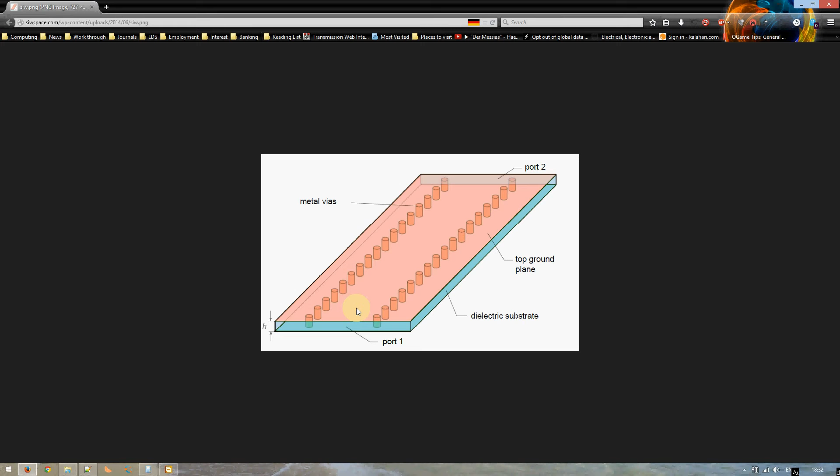We're going to go here, MW plus RF plus optical. That's the one that we want to use. And SIW is most like in the circuits and components. Basically, you just choose what your project is and the topic that it most resembles. Now, I know from past experience that waveguide couplers and dividers seems to work best. If you are building some of these other things, naturally that will be what we want to use. We want to use the time domain solver. The frequency domain solver can also be used. I'll go through why that is in a few minutes.

Dimensions, these are pretty straightforward. One thing that I would recommend looking at is here the units of length in millimeters and frequency in gigahertz, particularly because of the ranges that we're going to want to be working with. Millimeters and gigahertz are appropriate. If you're doing something with much higher frequency or very much smaller, then you may want to consider using micrometers or what have you. Conversely, if you're doing a very large structure, centimeters or meters may be more appropriate.

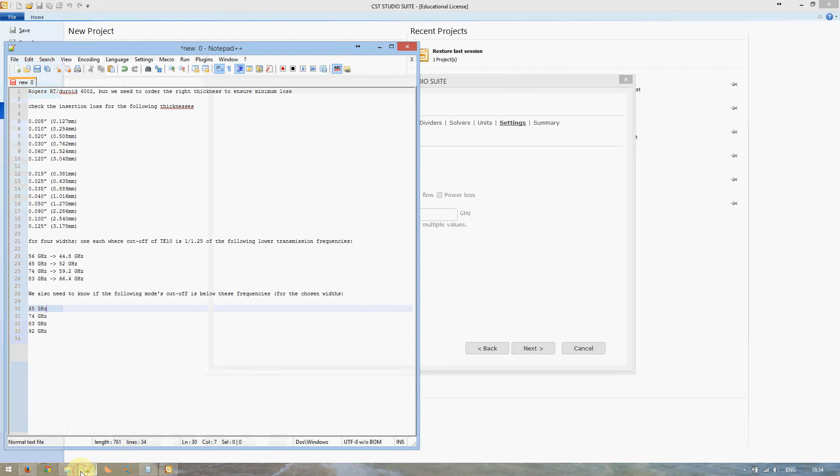The frequency range, this can be adjusted later, but for the time being I'm going to go with 56 to 83 gigahertz. You can set up field monitors if you like. This can also be done later, so I'm not going to worry too much about that for the time being. The last screen just gives you a little bit of summary. It's got this little underscore one here because I've already got a template that I've used. So I'm just going to leave that for the moment and click Finish. Then CST generates a new project. This may take a moment.

Okay, once it's done that, you have in the middle of the workspace, in my case on the right hand side, a list of some tabs: progress, messages and parameter list. The reasons for these will become apparent in a moment. This may be arranged on the bottom if you're a new user. I think that's the default. I put it on the right hand side here just because it gives you a little bit more space to see a longer list of parameters, and I don't need all that much space for the design.

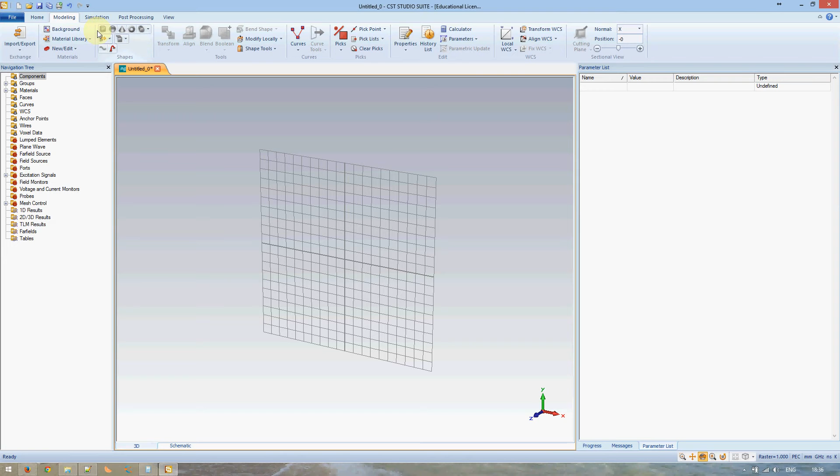Now, to begin building your 3D model, up here, the first tab is modeling. Now, SIW is built into a RF circuit board, so it is a good idea from the word go to simulate your structures so that they can be manufactured. CST can simulate all sorts of weird and wonderful models, but if you can't actually build them, then your simulations will be for nothing. You'll be wasting your time. So this is something to bear in mind. Find out, if you're planning on building any of these things, where you would manufacture them, what the process requirements are, what the limitations are, and do that.

So this little block that I've just clicked here is called brick, that generates a sort of six-sided 3D figure, a cube or a rectangle. And you can either pick points with your mouse, or you can press escape, which I'm going to do, and that brings up a little message box into which you can type things, which will help in making our project a little bit more easy to maintain and modify afterwards.

Now the name of the first solid, I'm going to call it RF substrate. You don't need to use underscores, you can use spaces, it's just a habit that I've gotten myself into. Xmin and Xmax, and similarly Y and Z min and max, show the range of your solid. It assumes that it is sort of perpendicular to the axes. The axes are shown here.

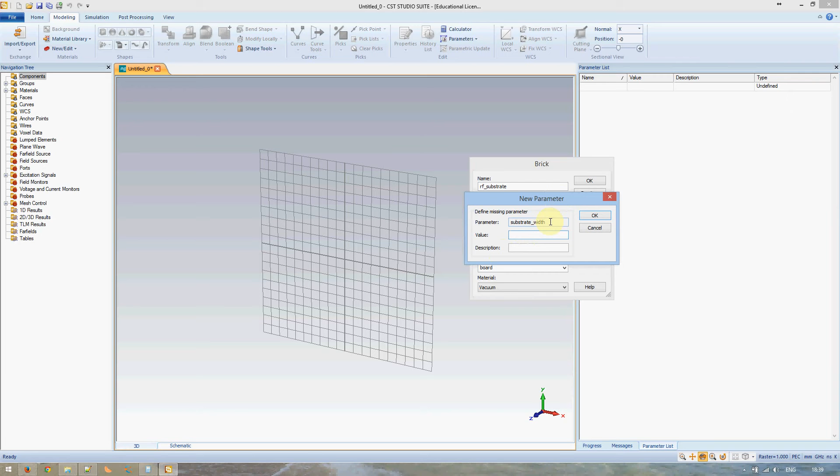If I click on preview now, CST will bring up a new box telling me to enter values for these things. I don't know what size the board is going to be. I can always adjust this later on. I'm just going to tell it that the substrate will be 50 millimeters wide and say 70 millimeters long and say 1 millimeter thick. I can go a little bit later and consult my list of sizes, but for the moment I don't really need to.

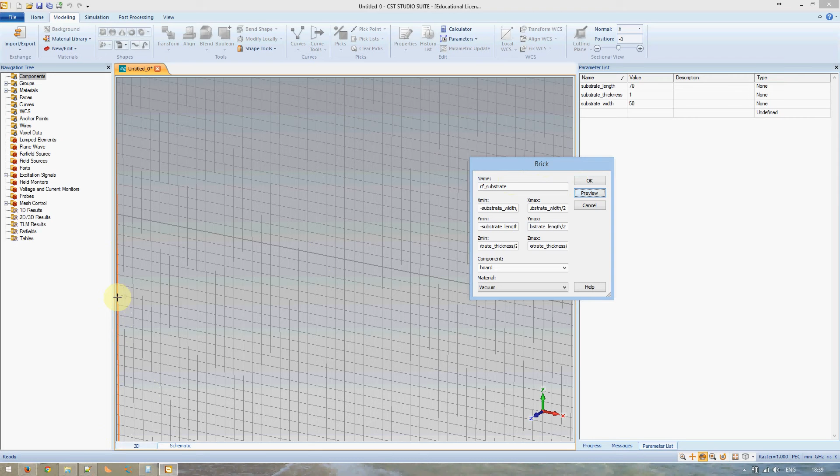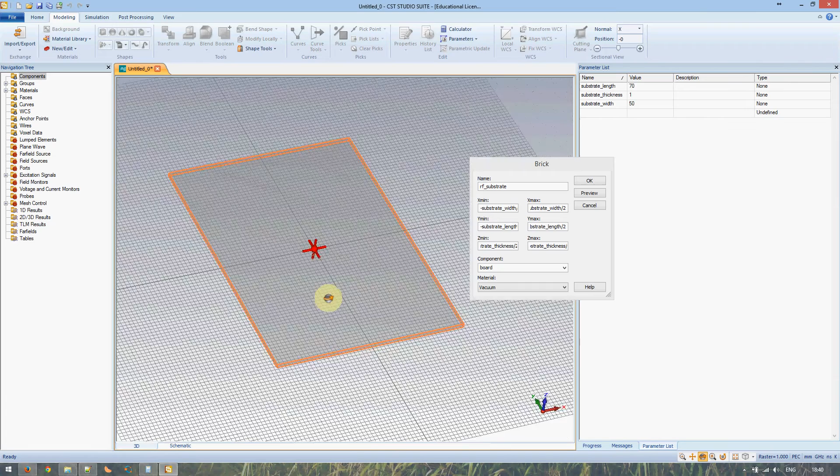Now, previewing that, you will notice that there's a little faint orange line on the left hand side here. So if I click on the view window and I scroll up with the mouse wheel, which adjusts the zoom, that'll show me a little wireframe of what the board is going to look like. If I middle click, then it allows me to pan. Control and click and drag allows me to rotate the view. Control and shift also allows me to pan. Alternatively, I can modify here in the bottom right hand corner what I want to do, but I find it easiest to use these shortcuts.

I do not want to make the board a vacuum. I want to load a material from the library. Again, this can be changed later. My instructions were to use Rogers RT Duroid 6002. So let's look for this. CST incidentally has a vast list of materials that are available. Here we go, Rogers RT 6002. I specifically selected lossy. You can simulate an ideal loss-free substrate, but I want to investigate the insertion loss for these substrates, so I'm going to simulate a lossy one, and it's a good idea in general to do that so that you can get a good idea of what your physical hardware will perform like.

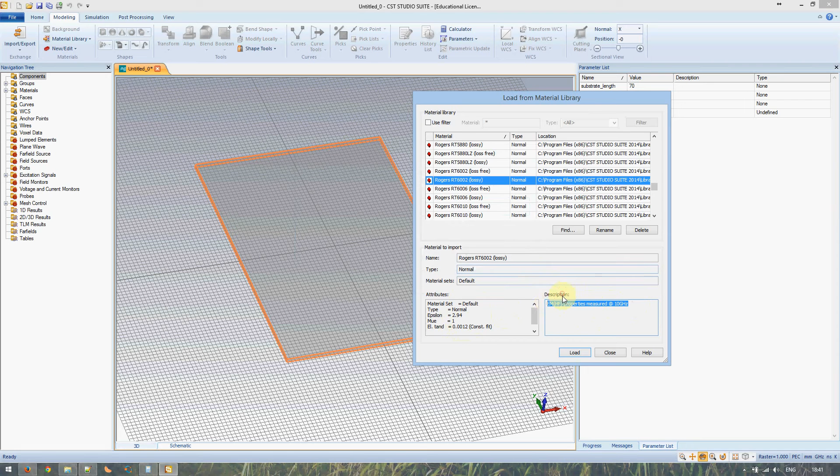It will show you that the dielectric constant for this particular material is 2.94, the loss tangent is 0.0012, and the electrical properties are measured at 10 GHz. This is a rather industry standard thing. Okay, load. And our substrate has been created. Step 1 is complete. Next step is to put metal on the top and the bottom.

So I'm going to put another brick, press escape again, and I'm going to put metal on the top first. I'm going to call it top metal. I'm going to make it cover the entire board. You can adjust this as well if you want to, but for the moment, minus substrate width over 2, substrate width over 2, and minus substrate length over 2. And for the Z, the bottom of the metal should coincide with the top of the board, so substrate thickness over 2. For the height, substrate thickness over 2 plus metal thickness. CST can solve mathematical expressions like this, so it can be fairly powerful.

One consideration that you may want to make: CST does have the option of a local coordinate system. You can see the buttons up here. I don't particularly like to use it, but perhaps you might find that it's easier. Of course, we don't want this to be Rogers, we don't want it to be a substrate, we want to load a new material, and we want to use copper. Gone down too far. Copper pure. Right, so that gives you some electrical properties of copper, electrical conductivity, the rho, etc.

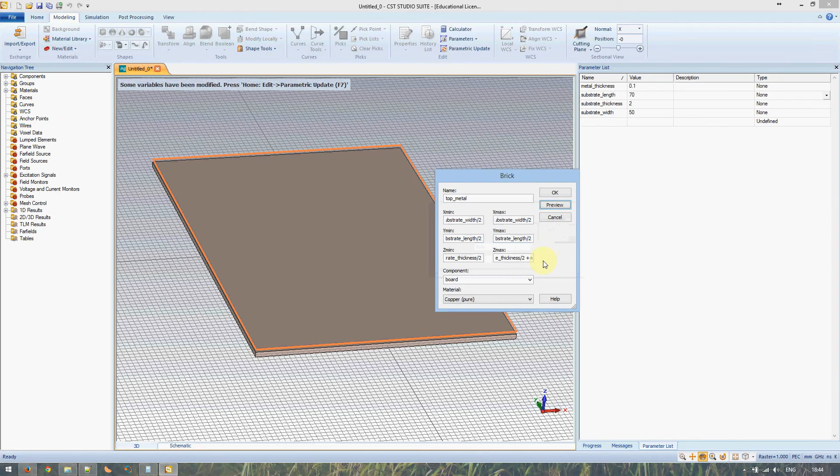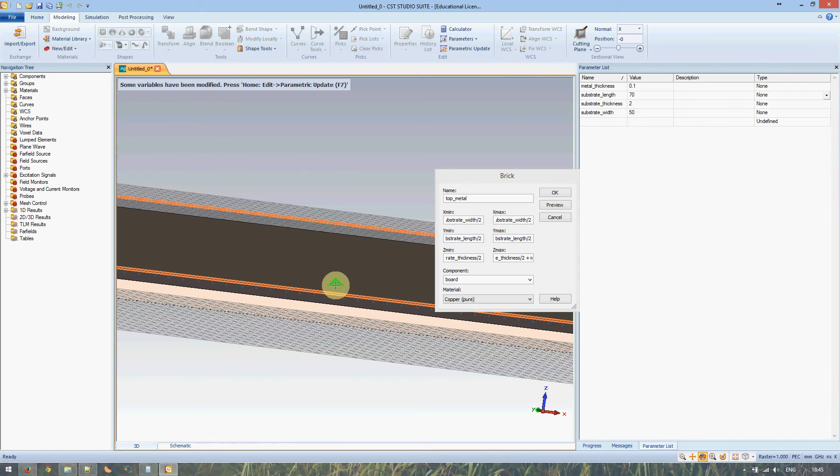That doesn't make any sense. What's happened? Why has this broken? Okay, doesn't seem to have broken. Strange little bug in CST there. It's just asked me for this substrate thickness twice. I'm not sure why it did that, but it seems to have recovered.

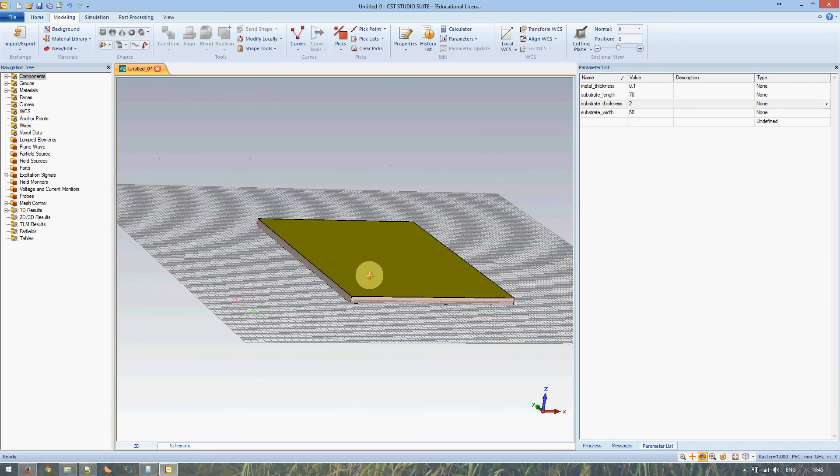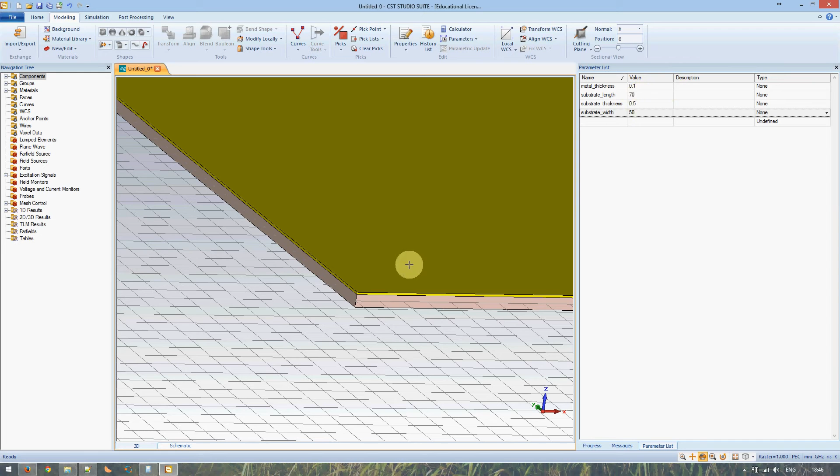Now, as you can see, as I have changed the value, so if I change the substrate thickness back to, say, 0.5, some values have been modified. Press Home, Edit, Parametric Update, or F7. So if I just hit the F7 key, it reads through the parameter list again and rebuilds the model, so it makes it thicker as well, which is one of the reasons why parameterizing your 3D models is always a good idea. And then you can easily modify them so that you can simulate various different values.

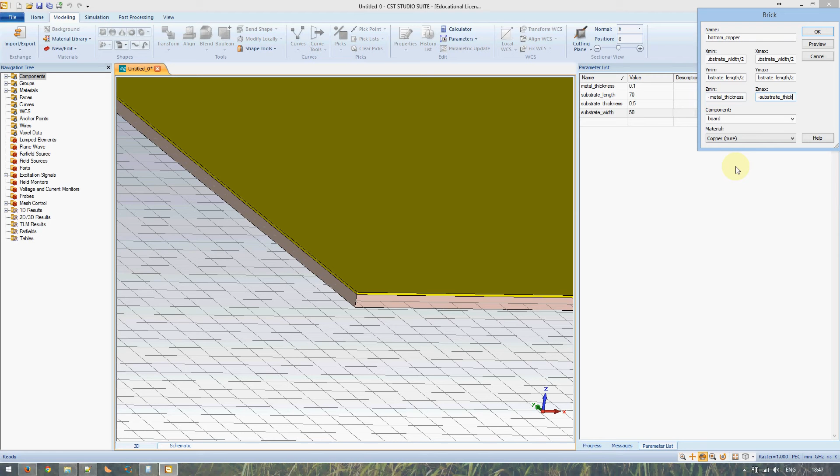Finally, putting another brick for the bottom copper. That looks right. To rotate, if you press Control and click and drag, then it is a bit finicky. You need to press somewhere on the model, and then it uses that as a pivot around which you can rotate. So if you get it wrong, sometimes you find yourself looking at something that you didn't expect to. Once you get used to it, it's not so bad.

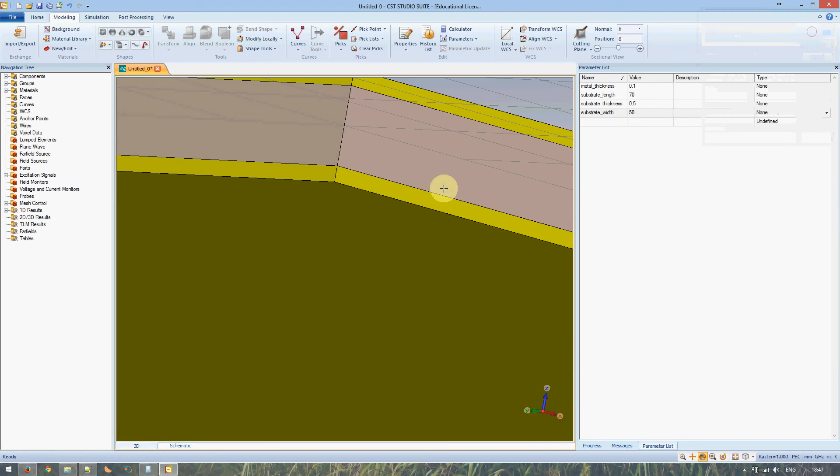Right, so now we have a board with cladding of copper on either side. It is 50 millimeters wide. I'm just going to exaggerate this a little bit and make this 70 millimeters long and 40 millimeters wide. Okay, so it's very clear which is length and which is width dimension.

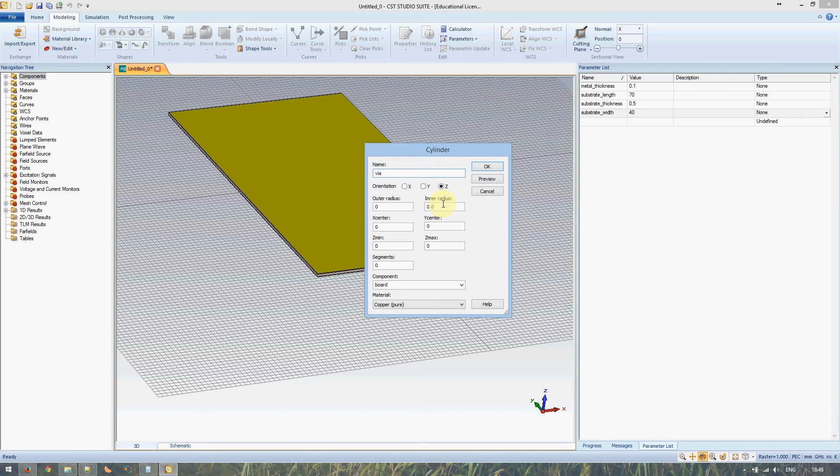Right, so the next component of SIW is the via to make the sidewalls. Now the vias are going to be running along this way, along the length of the SIW. And in order to make those, you click this button over here, cylinder. Same procedure as last time, except the box is slightly different. Now, the name, I'm just going to give it a name, via. Orientation means along which axis is the via going to run? It's going to run along the z-axis, which means it's going to go up and down.

The outer radius, I'm going to call it via radius. Inner radius, I'm going to leave it 0. X center will be, now you're going to need to do a little bit of thinking, a little bit of planning in this case. From experience, I know that you need to do something a little bit like this. Minus SIW width over 2. So X center is where along the x-axis this via is going to be. SIW width is a new parameter that I have just made, and it's going to be somewhere arbitrarily along here.

The Y center, I want to put it down here at the front. I want to make it minus substrate length over 2 plus 3 times via radius. That's just to keep it a little bit away from the edge of the board. Zmin, minus substrate thickness over 2 minus metal thickness. So the cylinder is going to go right from the bottom straight up to the top.

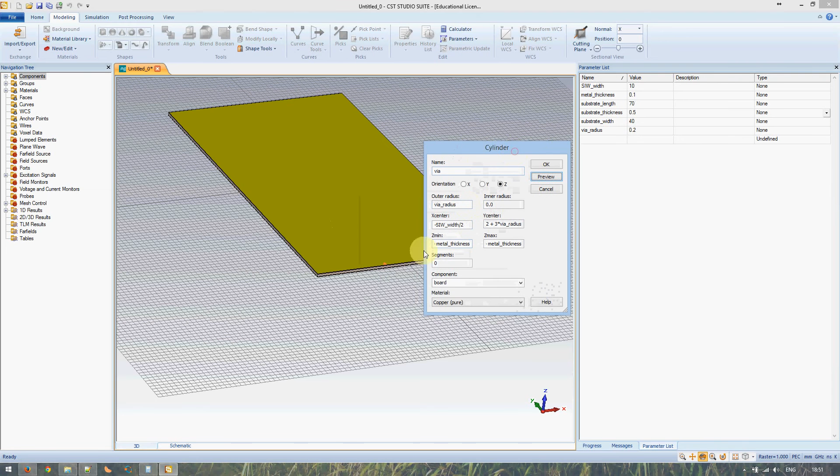Now, you can go and look those up if you like, and I recommend that you do. For the purposes of this video, though, I'm just going to guess, and I'm going to say perhaps that the SIW is 10 millimeters wide. And we should see a little via here presented for our view.

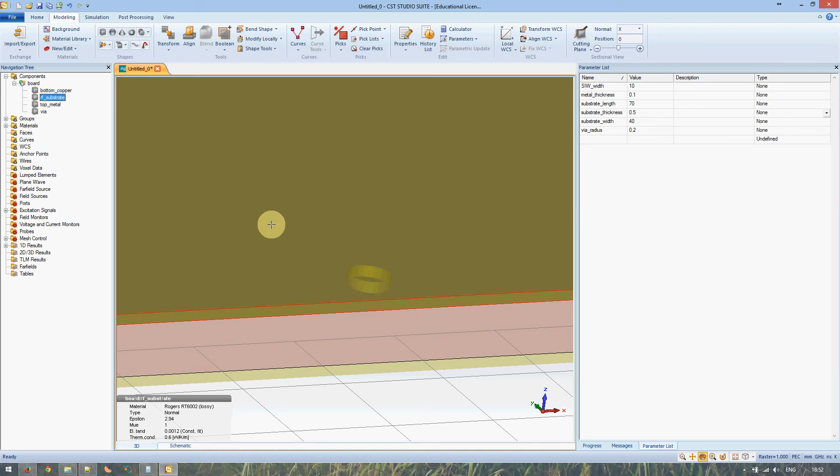Now, it's sort of disappearing away into the material underneath. So if we come up over here, okay, it won't let us do that until we're finished with this. Let's just click OK. Let's see, make a via circle there. On the navigation tree, if I navigate to RF substrate and I click on it, then it's highlighted. It sort of makes the other shapes transparent, and it highlights this one.

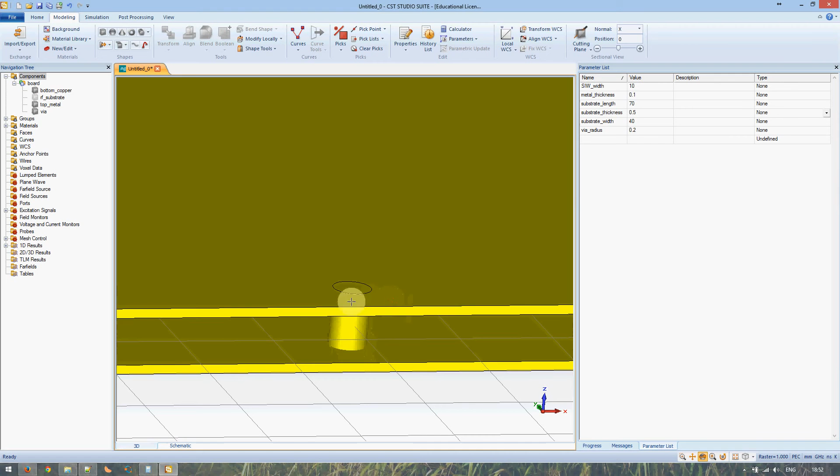So for the purposes of building, to make everything a little bit easier to see, I'm going to hide the dielectric board. So you'll notice that it's hidden away. It's still there, and when it simulates, it will simulate properly, but it's just not visible. So now you see we've got two plates of metal with a metal cylinder connecting the two as a via.

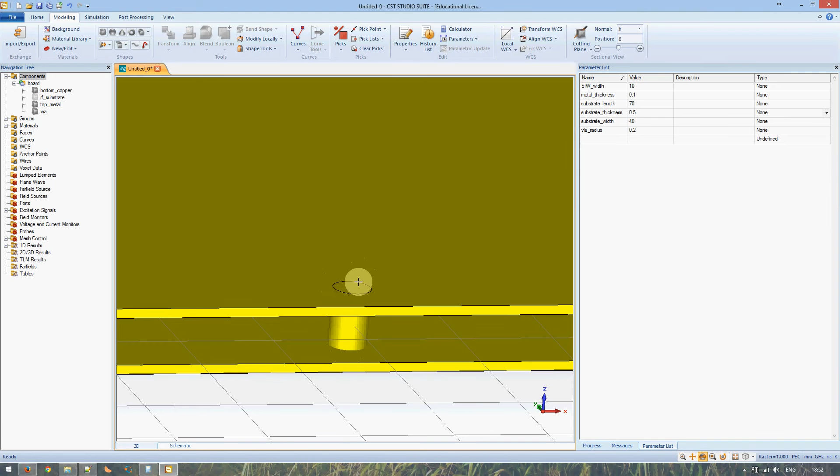Now, I usually leave the inner radius as 0 to make CST simulate a solid cylinder of copper. Because of the skin effect and other things, this doesn't really make a difference, even though vias are usually just holes that have plated metal on the inside of them. So they would only have a very thin piece of metal, and on the inside would actually be air. But for the purposes of simulation, that very seldom makes a difference.

Now, it would be very tedious to have to go and place each of these vias by ourselves manually. Fortunately, CST has a transform command. So the first thing that I'm going to do is translate, to mean move it around in a direction, and I'm going to say copy and unite. What that does is, instead of making 100 little vias and each of them coming up in the list over here, it joins them all into one entity.

Repetition factor, this can also be a mathematical expression. So I'm going to make this substrate length divided by via spacing, -1, just so that everything fits. The translation vector, it will be in the y direction of via spacing. Now if I preview, it's going to ask me what the via spacing is. I'm going to define this in terms of the via radius.

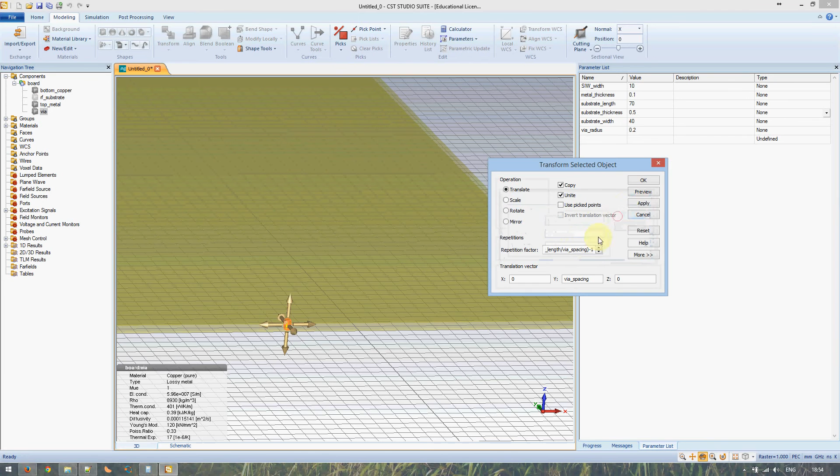General SIW principles suggest that your vias should be spaced at 4 times the radius or twice the diameter, to ensure a minimum amount of vias and also a minimum amount of losses. Okay, preview. Okay, so you'll see there that it's made a length of vias all the way down, and no, it looks as though one of them is still sort of jutting off the end of the board there. So I'm going to make this -2. Preview. Right, that's fixed. Apply.

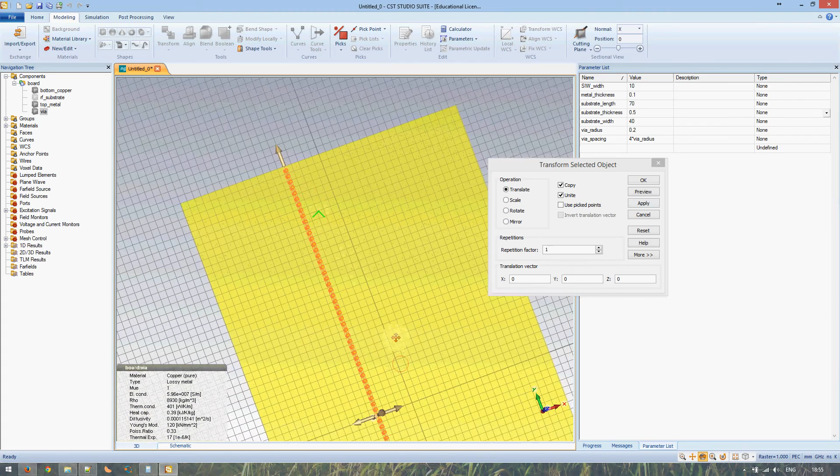Now what I want to do to make the other side of the SIW, the vias down the right hand side, is I'm going to say mirror. Copy unite I'm going to leave. Repetition factor 1. Now mirror plane normal. Around what plane do I want to mirror it? I want to mirror it around the YZ plane. That means I'm going to use X plane normal 1, 0. There. And the center can be the origin.

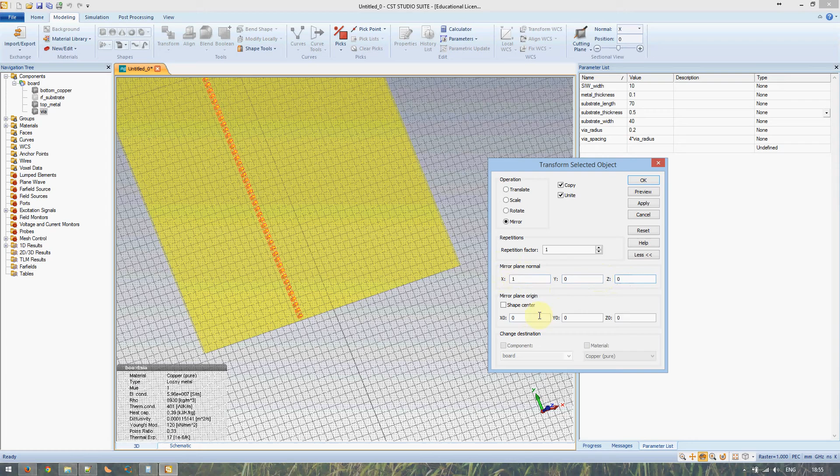That's fine. If I click preview, you'll see that my guess was correct. That X plane is the one that I want. Sometimes I get it wrong, but that preview tool is useful, in that it just shows you what is going to happen before it actually happens. Okay, so click OK there, and now I have a section of SIW.

Right, so now I've got the 3D model. Now what? I have the opportunity to parameterize things, to change things a little bit, and the model will adjust itself accordingly. Even the via radius, for example, if I make it a 0.3 millimeter radius, then press F7, the size and the spacing and even the number of vias will have adjusted themselves accordingly.

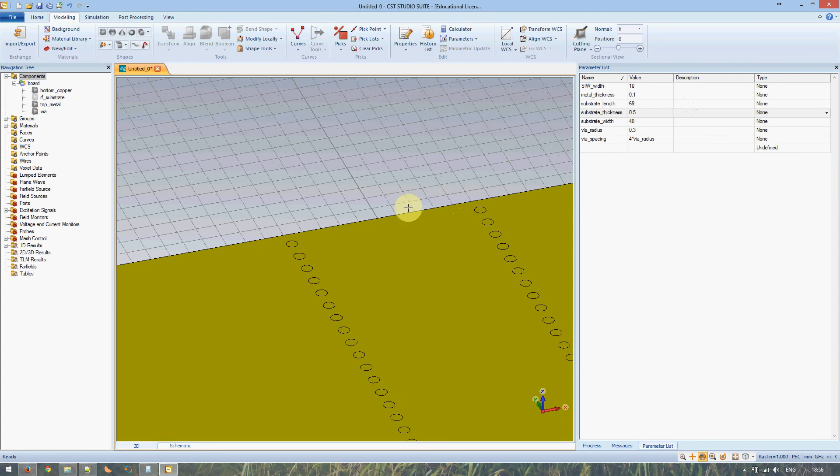Because this is an integer thing, sometimes the spacing between the board edge and the last via is a little bit unsatisfying. So what I generally do is sort of shorten by maybe a millimeter, 69, just to make things look a little bit even. If you have a more serious design and you want to be a little bit more rigorous than this, then you can.

If your design is a little bit more serious and you want to be a bit more rigorous than this, then you can. But for most purposes, I find that this works just fine. Right, so to go about simulating this, the simulation tab at the top is where we'll find the tools we want. The frequency range we've already chosen. The background we do want to choose, however.

Now, material type we do not want PEC, but want normal. PEC stands for perfect electrical conductor. Normal means just normal air, vacuum, whatever the case is, normal space. Click OK. Boundaries is another important thing.

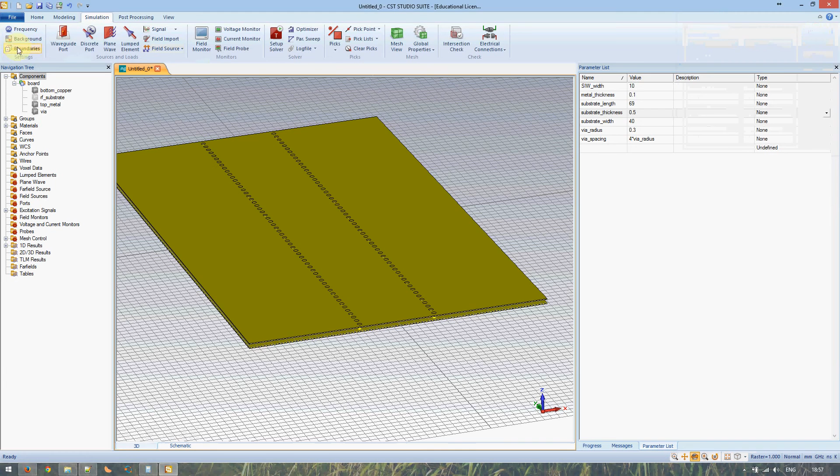Now, the bottom, I'll look at that first. We want the bottom, in other words, Z-min, to be an electric wall. What does that mean? Well, essentially, we want our bottom plane to be a ground plane. We want the tangential electric fields to go to 0. That's what it indicates there, ET.

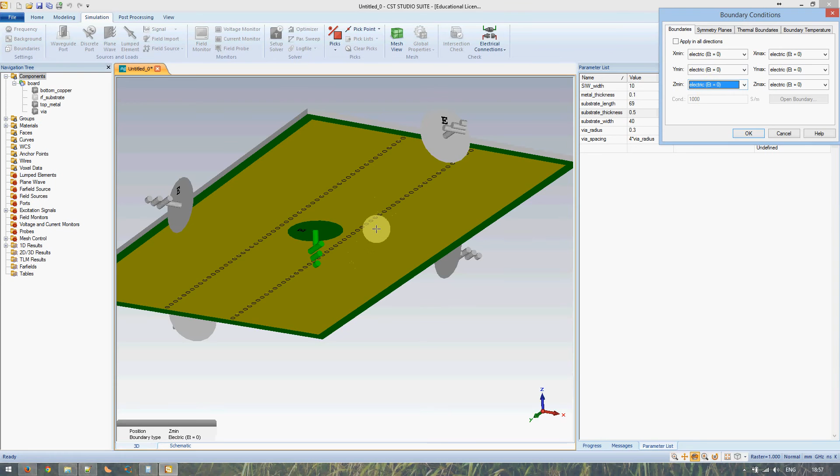In the X direction, X min and X max, that's fine. Think about what would happen in a real situation. You wouldn't have really anything on either side of your PCB, it would just be open. The top, however, would normally be open as well. So that is Z max. What I normally do there is open add space.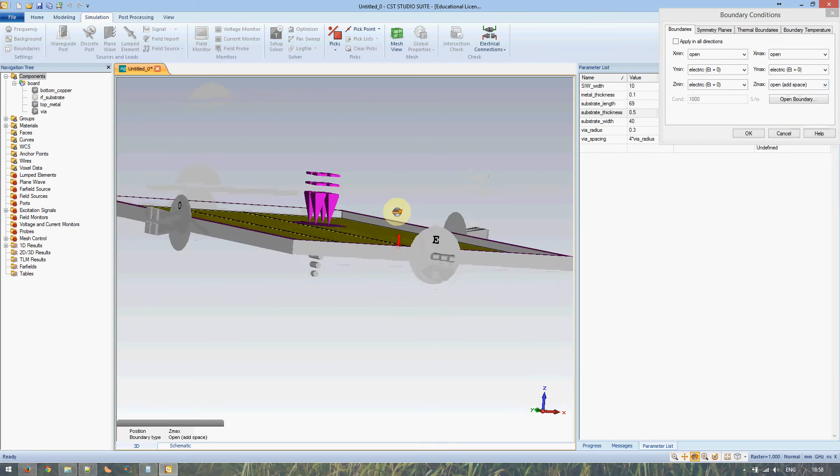And then what CST does is it adds a little bit of space above your model according to your frequency. Because we're at 56 sort of gigahertz, the space is quite small. If we were at a lower frequency, say 500 megahertz or 1 gigahertz, you would see that it would make quite a bit of space above.

In a waveguide simulation like this, it doesn't really make that much of a difference, but when you incorporate your SIW with other structures on the board, such as microstrip for example, they would be interfered with if there was an electric wall on the top boundary of the simulation. So to keep it consistent, I think this is just better. And the Ymin and Ymax are going to keep electric walls because I'm going to put waveguide ports there. You'll see what happens there in a moment.

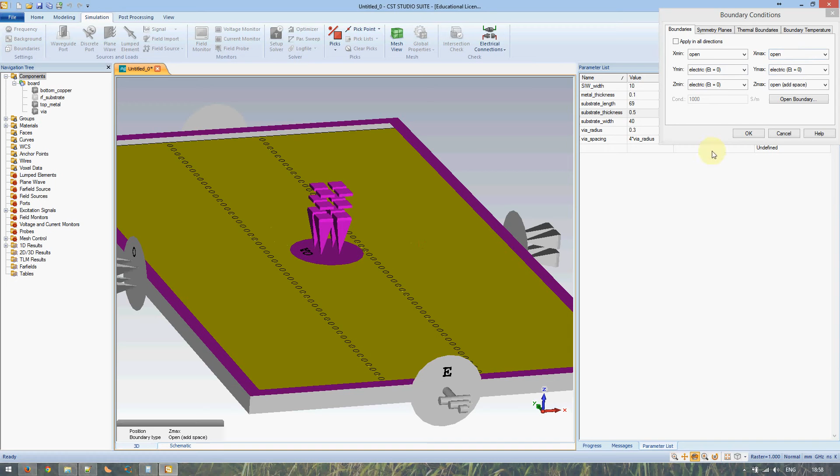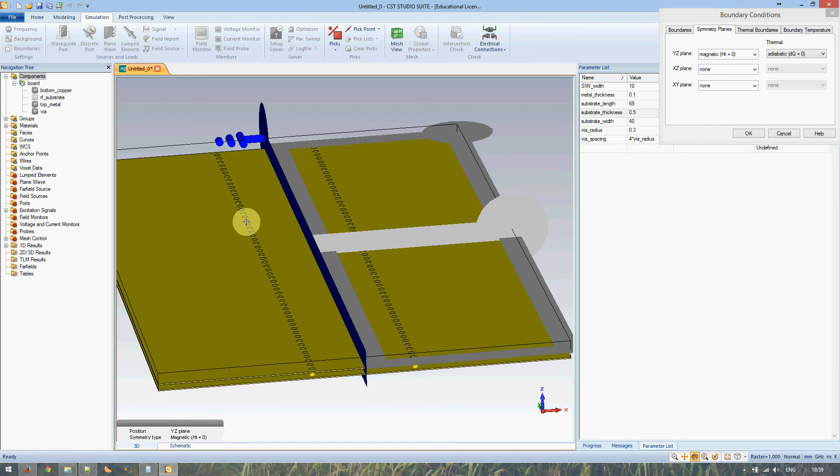Symmetry plane, it is nice to use the YZ plane as magnetic symmetry. What does that mean? Well, the magnetic fields on either side of the Y axis are going to be symmetrical. That means that it saves us a little bit of computer time because the software only needs to simulate one half of what it would otherwise, and for the other half it just copies what it simulated on the right. Now we click OK. I think that is it as far as the settings go.

Then we need an input and an output port. Okay, so we do that by clicking waveguide port. CST always guesses wrong. Perhaps it thinks that the default axes are the ones that I don't use. In any case, we want ports to be normal to the y-axis. I want to start out with port 1. And yeah, positive orientation. So it's coming from the minimum y and it's pointing towards the maximum y. I do not want it to be a full plane port. I want it to have free coordinates.

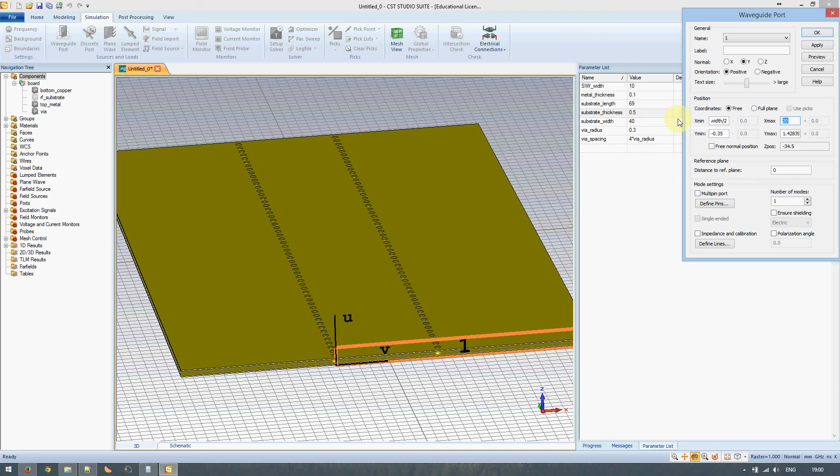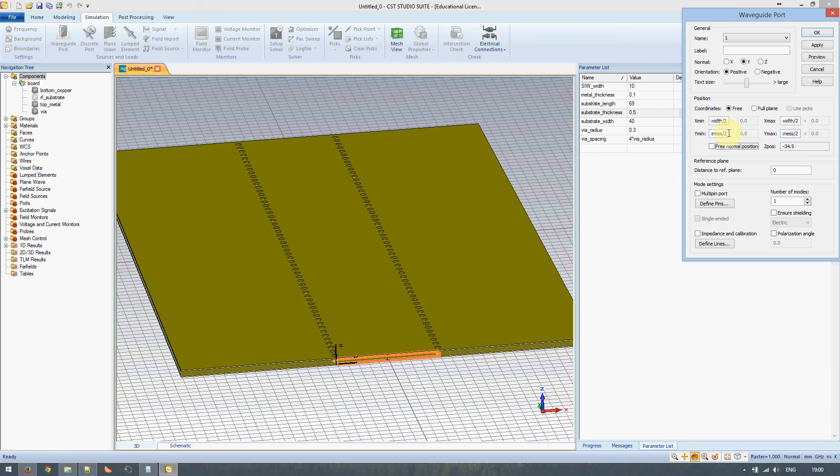And so the x-min will be minus SW width over 2, and x-max will be plus SW width over 2. Okay, you'll notice that in the preview window it has shrunk the port to the size of the SIW. That makes sense. Y-min, I want it to be minus substrate height over 2, and Y-max, there we go, I caught myself out. Minus substrate thickness over 2 and substrate thickness over 2. There we go.

Okay, so having a bit of a closer look, we see that the waveguide port has inserted itself nicely over there. If you want, you can make it a little bit wider to include the metal and the length of the wires. I find that this doesn't make a terrible amount of difference, but you can experiment with it yourself and find out. Don't worry too much about the other stuff for the moment.

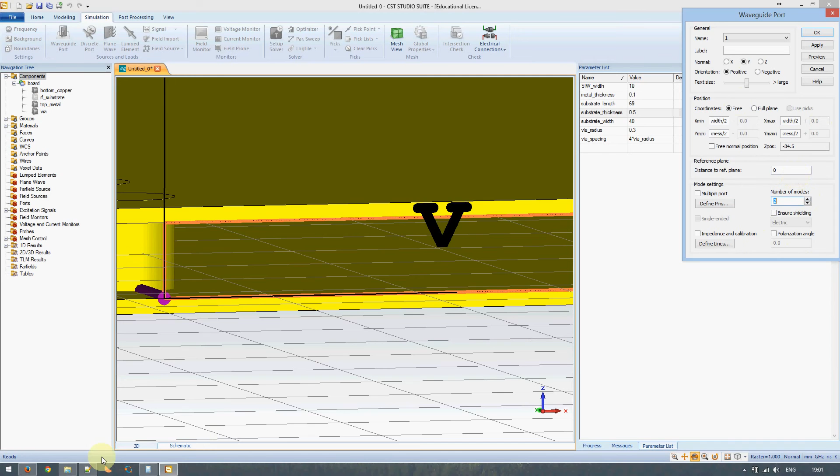What I am going to do though is add another mode. So there'll be two modes here I want to simulate because of this, and I'll come back to it in a moment. Okay, click apply. Then it will go automatically to port 2. And for some reason, CST is a little bit buggy, that even though it had Y selected, it was pointing in the Z direction.

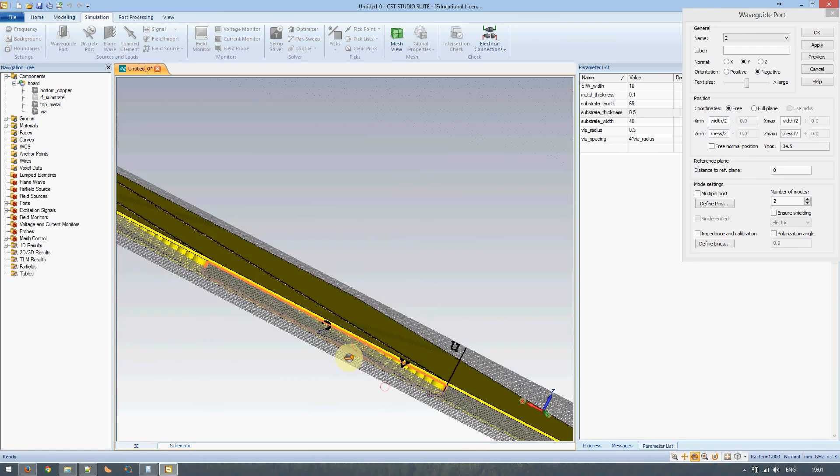Anyway, never mind, negative. So you'll see that the negative port has appeared on the other side. If I flip the model around, it already has the right sizing because it's kept it from what we did the first time. It already has two modes. So we just click OK. Right. So I think that is it as far as our model goes. Now, what I'm going to do first is here, click Setup Solver.

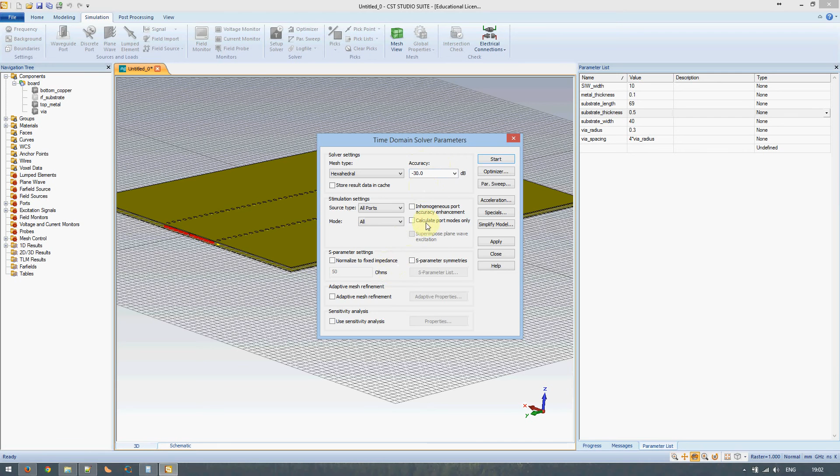Accuracy of minus 30 dB, that has to do with the way that the time domain solver works, and we'll talk about that in a moment. What I want to do first is have it calculate port modes only. And I'm going to let it start. In the meantime, I'm going to explain. So now if we click over and look at the progress tab, it'll show you how far it's getting. Now, because it's doing port modes only, it won't take that long.

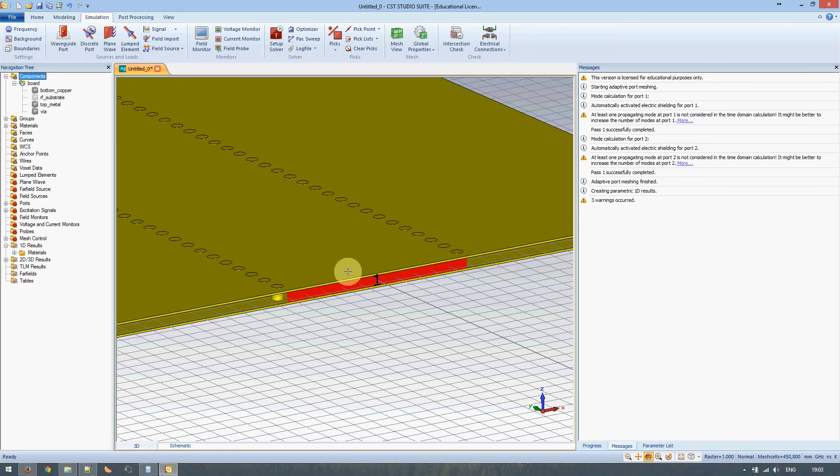What happens in the transient solver, the time domain solver, is that it puts an input signal, and here under 1D results, when we've actually done the simulation, you'll see it in at the one end, and then waits at both ends for the signals to come out. If your frequency range of the simulation is below the cutoff frequency of your SIW, then the energy will just sort of bounce back and forth. The waveguide will cut it off. It won't propagate down the waveguide, and it'll just bounce back and forth here in a sort of a resonant kind of structure, which means that the time domain simulation will take a very, very long time.

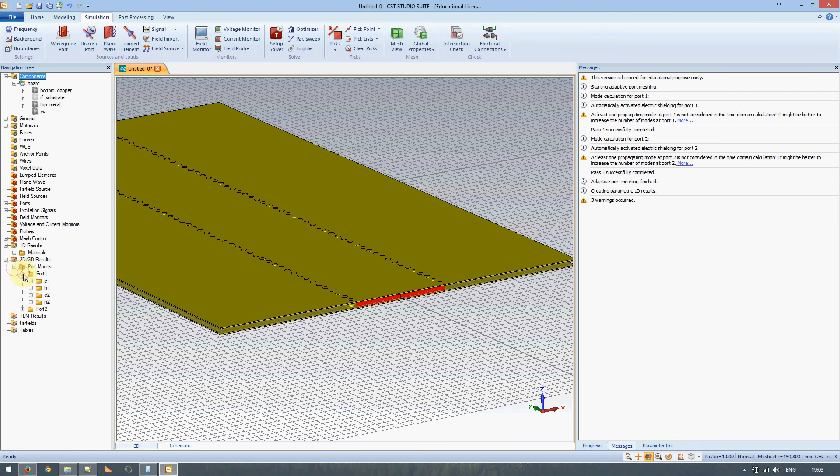So you want to check that you are operating above the cutoff frequency before you set up the solver properly. Now, to see what it's got here in the 2D/3D results, port modes, port 1 or port 2 will be the same, E1. Now it'll plot me a little bit of an electric field, and that looks exactly like a TE10 mode. You'll notice here that the F cutoff is 8.7. So that means 8.7 gigahertz, and my SIW is far too wide if I wanted to go for 56 gigahertz.

Similarly, E2 means the second mode. Now the second mode that will propagate, because the SIW is reasonably symmetrical, unless you deliberately excite it, will be a TE30 mode, and its cutoff is at 26 gigahertz. Okay, how to rectify this? Well, let's make the SIW a little bit smaller. Go back to the parameter list. I'm going to make the vias a little bit smaller again, 0.15. Yes, okay, if you change the parameters, obviously the results are no longer valid, so you need to delete them.

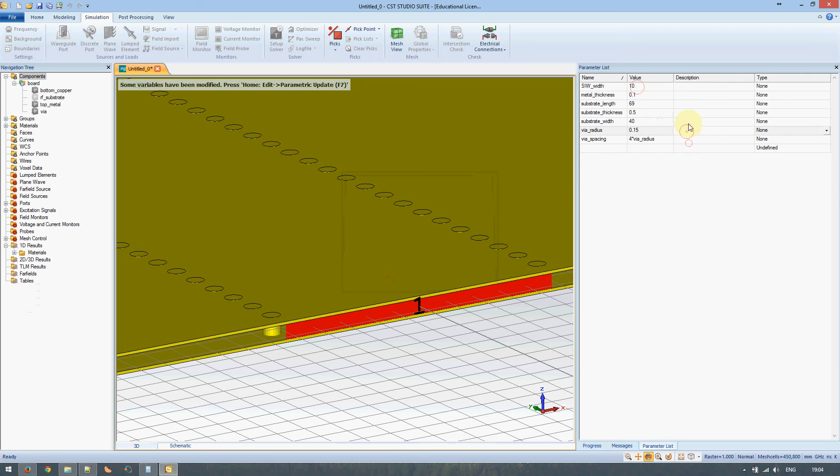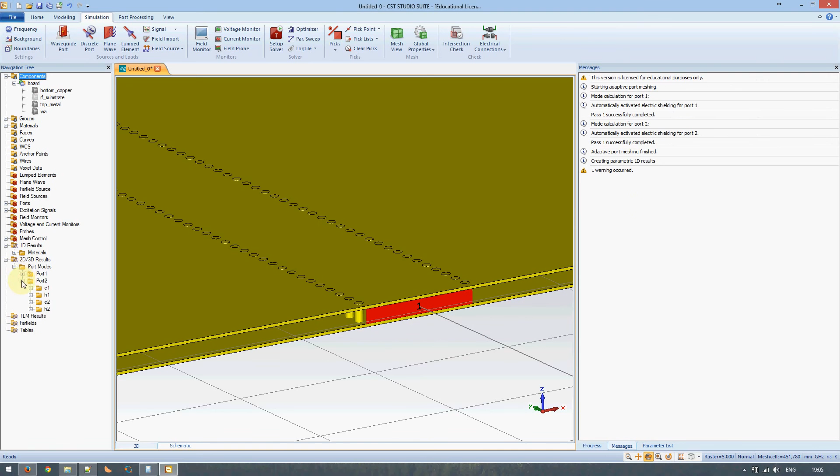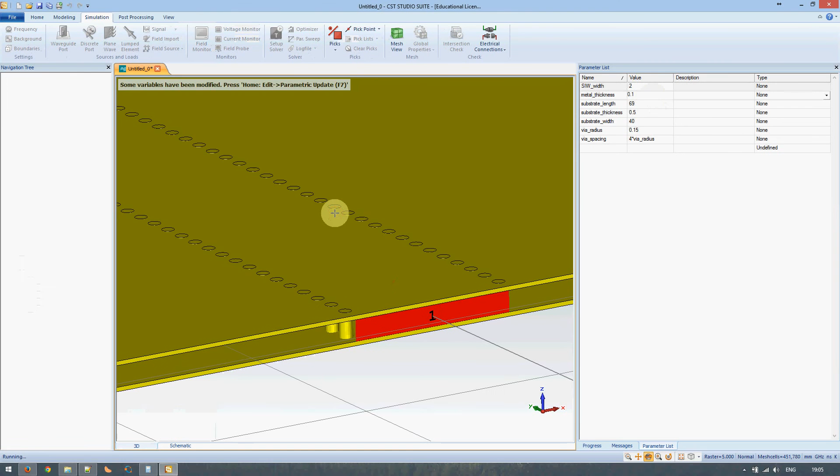Then SIW width, I'm going to change that to, say, 4 millimeters. Press F7 to update the structure, and you'll notice that it's now very small. Okay, let's try again. As I said, if you'd used your analytical equations like good Boy Scouts, then this wouldn't be too much of a problem. Okay, now we're getting a little bit closer, 21 gigahertz. Looks as though this SIW is going to be very, very narrow for these high frequencies. SIW width 2 millimeters. Try again. Okay, now it's looking very narrow.

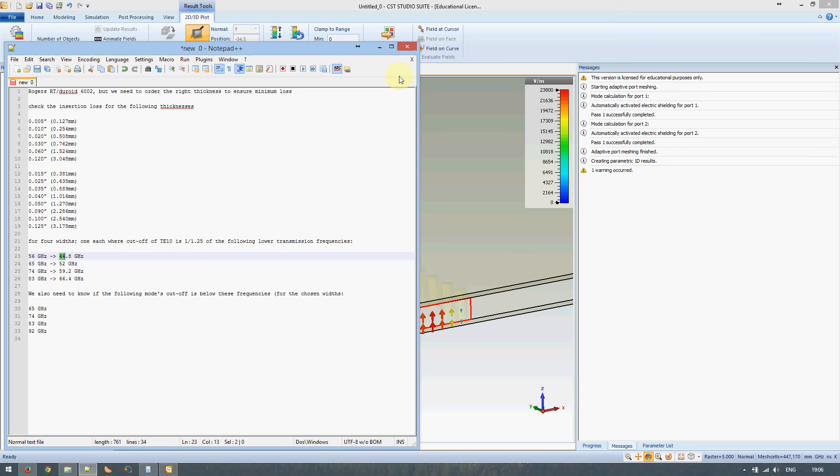Okay, it's finished again. Port modes, port 1, E1, F cutoff 43. Okay, so now we're in the right order of magnitude here. Generally, if you're working with that sort of thing, you want the cutoff mode to be your minimum frequency of interest divided by 1.25 to give you enough headroom so that you don't have any of your signal that's lost. 56 divided by 1.25 is 44.8, and we see that the cutoff frequency is 43.6. That's for many purposes close enough. The next mode has a cutoff of 128 gigahertz, and that is well above the limit of 65 gigahertz that was imposed.

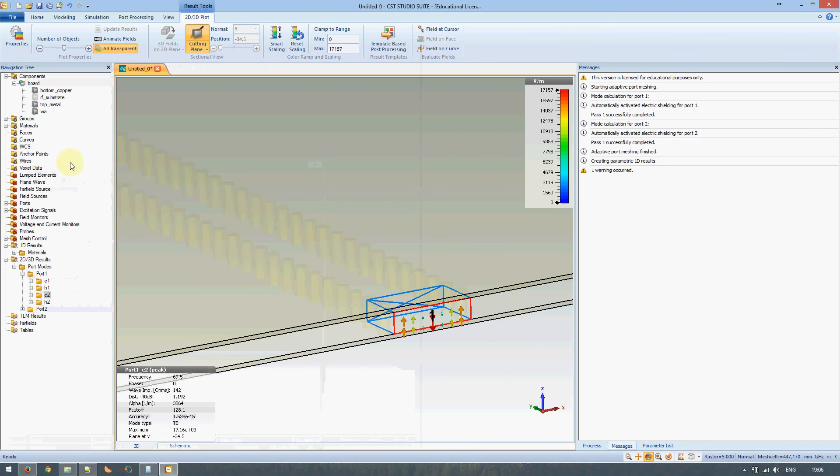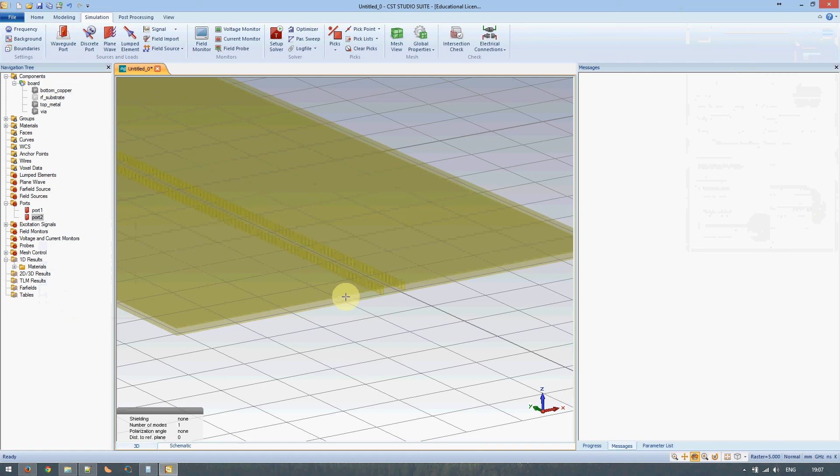Okay, so the process is iterative, and you would go through it like this. So now we're certain that the cutoff is where we need it to be. We're not simulating over any cutoff modes. Frequency range again, make sure that that's fine. Back to setup solver. Actually, wait, hang on, before I do that. Once we've established that the second mode is not going to interfere with us, I'm going to go back to the properties of the ports and reduce the number of modes to 1. So it will only simulate the first mode, and it'll save us some computing time. If you're doing just one run, then this doesn't make much of a difference, but if you're doing parametric sweeps or optimizations where you have lots of runs after each other, this can save you a lot of time in the long run.

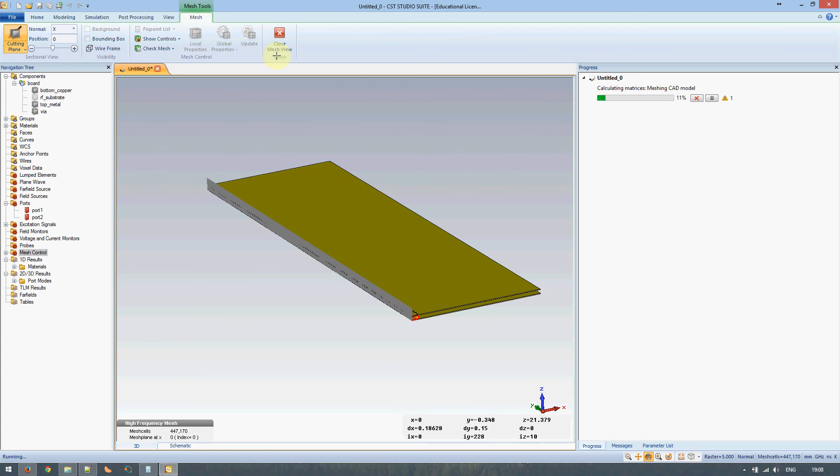Okay, setup solver, we uncheck calculate port modes only, and we click start, and it will start to mesh the model and then compute the cutoff. So what you may like to do is click on mesh view, and that will show you how it is discretizing the model for simulation.

Now, an interesting thing about the time domain solver is that the first 3 mesh cells after the port need to be homogeneous. Now, luckily, because we are at such high frequencies, the mesh that it's generated has 3 first homogeneous cells, although you may notice that these are a little bit thinner than the ones over here. CST is a little bit clever in that way.

Sometimes it can't do this by itself, and you need to manually adjust the mesh properties. You do that by clicking on global properties and adjusting the number of mesh cells per wavelength. You may also just need to extend this a little bit, or make one of these vias rectangular deliberately and push it up straight against the port, just for the purposes of the solver. That's just one of its eccentricities. The frequency domain solver doesn't require this, but it is a little bit slower in these sort of circumstances.

Okay, so you'll notice that it may take a little while. It gives you a bit of an estimated countdown of how long it may take. And if you're working on a laptop as I am, you may notice at this point that the fan starts blowing and it starts to get pretty hot. So it is working quite hard.

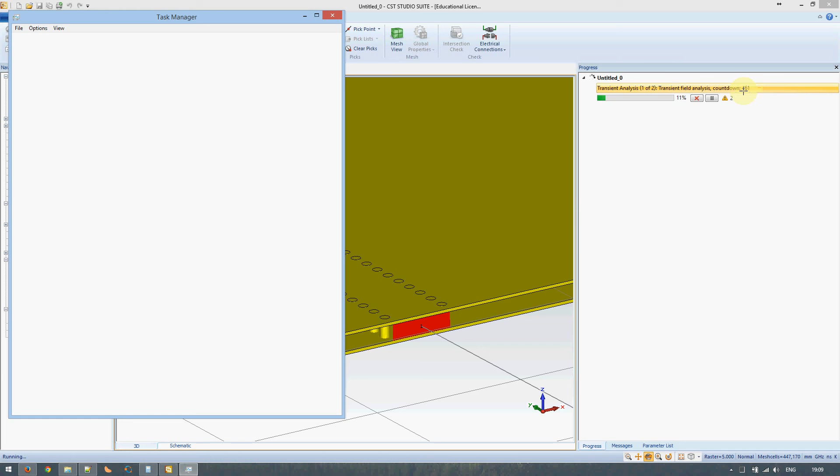If you fire up Task Manager and click on Performance, which may take a while, you'll notice that it's revising its estimates reasonably quickly. It's coming down, so it won't really take 500 seconds usually. With one exception though. So you see the CPU usage graph is quite high, and it's using a lot of memory as well. Yeah, it's using transient solver in 64-bit mode.

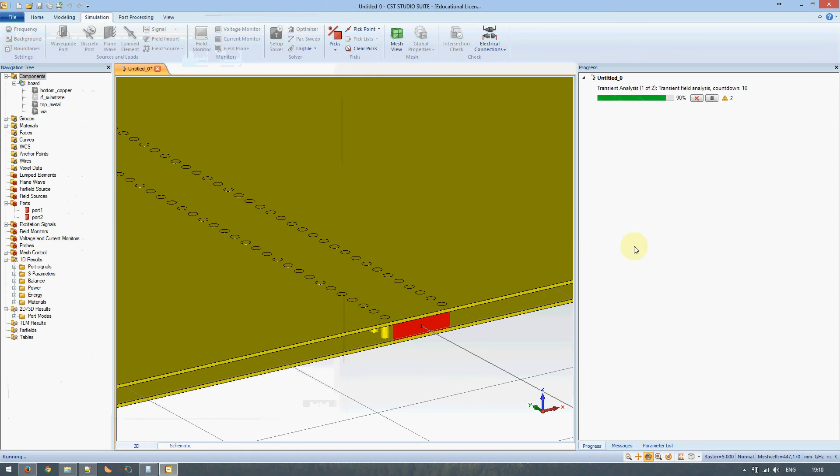Okay, so transient analysis 1 of 2. It does 2 because it does 1 from each port. You can tell it to use S parameter symmetries, in which case it usually only does 1. But if you want to be really accurate, then you uncheck this option. But one exception, in which case transient solver will struggle, and you will see huge numbers here, is if you are simulating over a cutoff frequency and the energy starts to bounce back and forward.

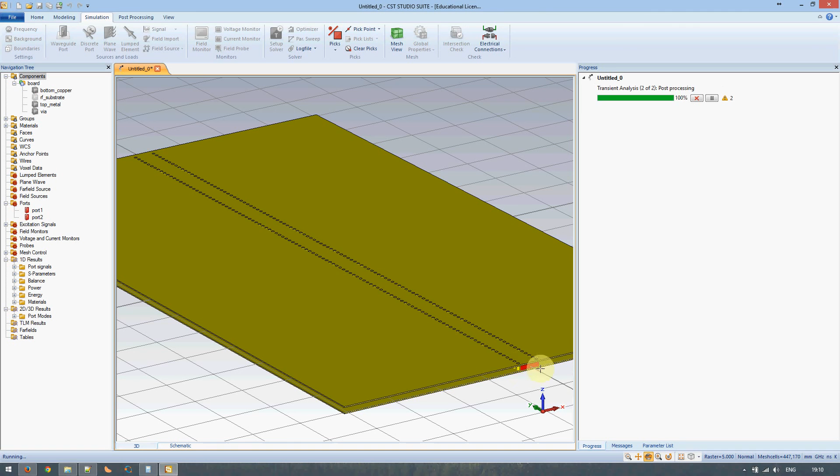It's useful at this point if you understand a little bit of computational EM. I found that even just the limited knowledge that I had, a little bit of reading that I did, helped me to understand what CST was doing. So the modes that are not propagated generally bounce back and forward inside the waveguide. The transient solver works by putting in a signal at the front and seeing how it comes out at the end and at the front again if there are any reflections.

It does a numerical technique based on Maxwell's equations, and it waits for the signal to die down past a certain threshold. So that option that we had, accuracy minus 30 dB, it waits until the signal in all the cells is 30 dB lower than the amount of energy that you put in the front in the beginning. If you simulate over cutoff, the stuff just bounces back and forward, and it never reaches that. Well, it does eventually reach that minus 30 dB, but then your results are wildly wrong.

Frequency domain solver uses a phasor-based technique, but it has to do many frequency samples. So particularly if you're doing wideband applications and non-resonant kind of stuff, it does take longer, and it is better to use the transient solver. And if you want to verify the response of your waveguide structures over the cutoff region, you should use the frequency domain solver. But if you're doing parametric sweeps or optimizations, then I would suggest that you limit your frequency range to the modes that pass, and then once you've optimized your design, it'll be done.

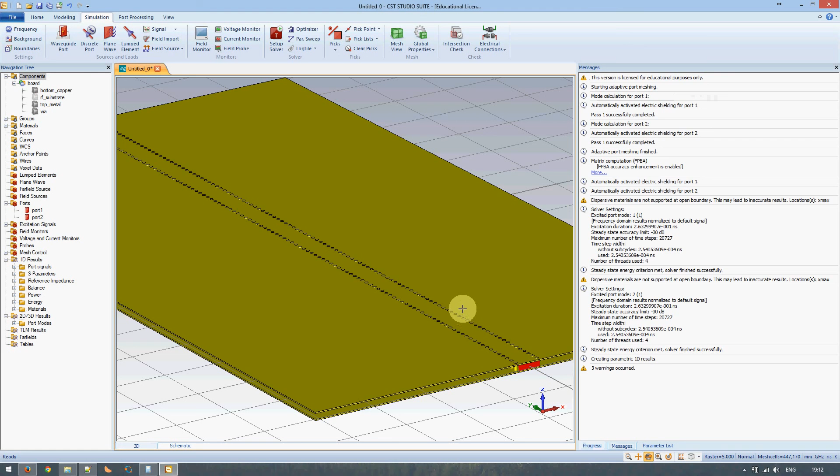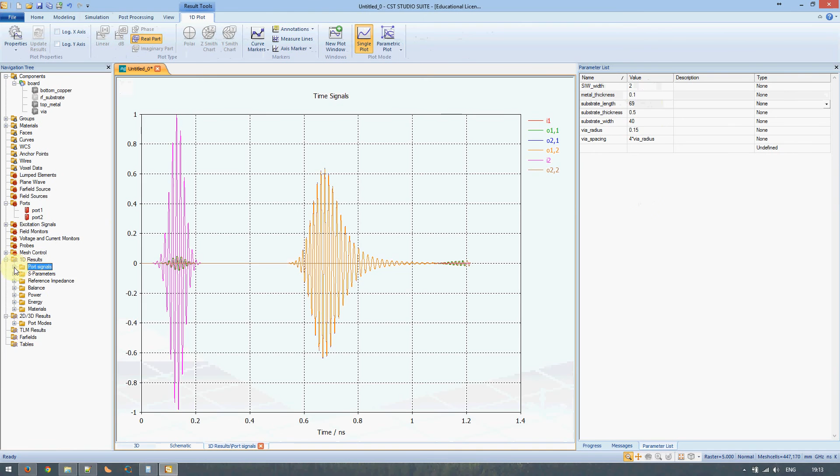Okay, so that appears to be finished. It hasn't taken too long. So here under the 1D results folder, a number of things have shown up, and you'll see this is more or less what I explained. This is the signal that was input, and then this is the signal that it saw at output 1 and at output 2, and from these it calculates S parameters. Now this is more or less what we expected.

S21 and S12 are basically the transmission. S21 is what port 2 sees as a result of what was put in port 1, and S12 is exactly the reverse. It is what port 1 sees as a result of what was put in at port 2. S11 is a measure of how much reflection there was, and for a microwave structure, this sort of minus 20 dB level is pretty good.

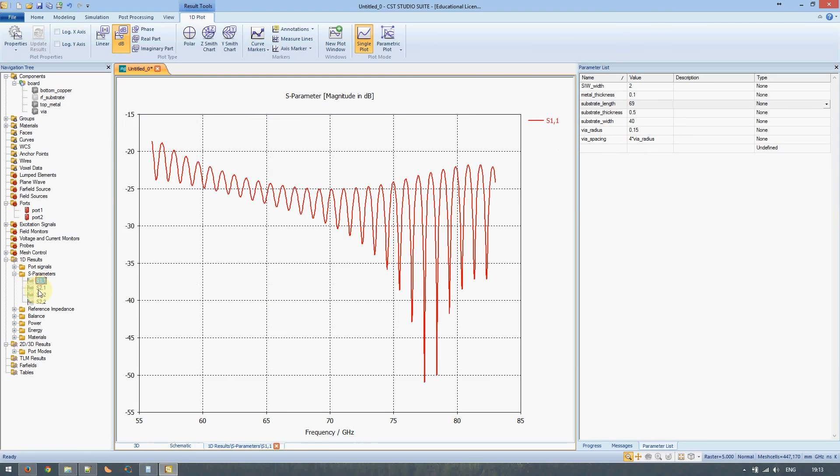The insertion loss that we were asked to do is found specifically in S21. This means that over this frequency range, the insertion loss is roughly between 1 dB and 1.6 dB. You'll have to determine whether or not this is suitable for yourself. In SIW, this varies according to various things, for example, the thickness of the copper, the height of the board, the dielectric constants, and the loss tangents of the board, according to relations that have been derived in the literature. I would suggest that you go and look these up if you're planning on doing a comprehensive study.

I think that is all that is needed for now. Right.

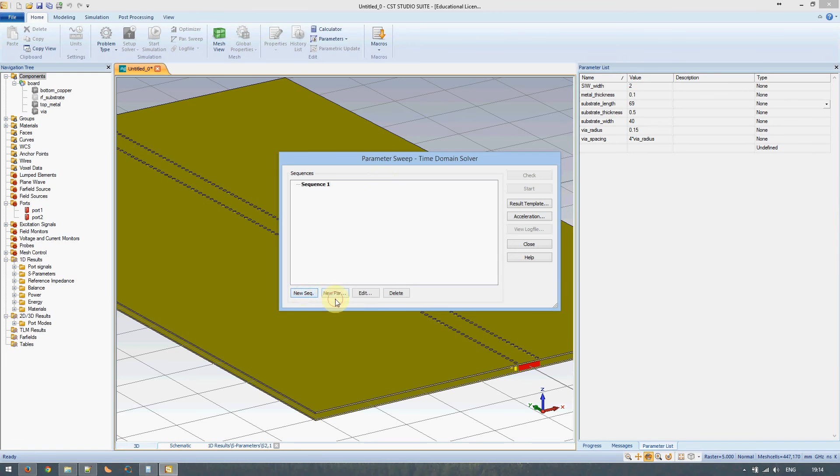Okay, so the next thing that you will likely want to do is a parametric sweep. If you want to run the same simulation over a number of different parameters: new sequence, new parameter, say you want to sweep SIW width, linear sweep or logarithmic sweep or arbitrary points. If you have specific points that you would like to use, for example, these board heights, then substrate thickness, arbitrary points, and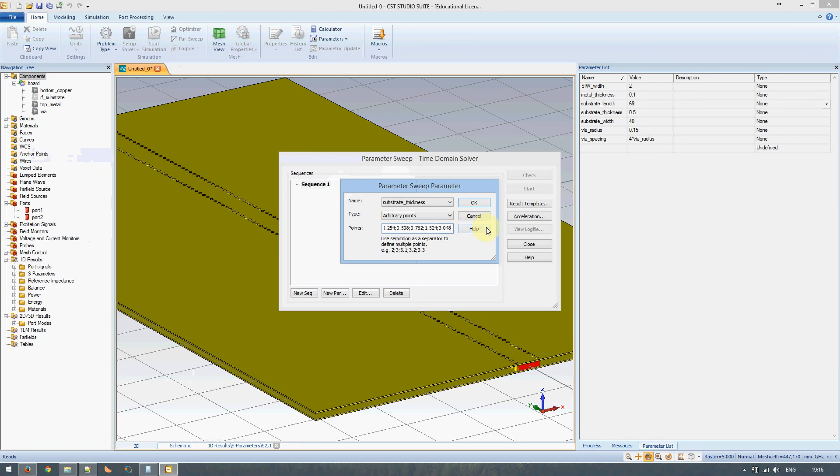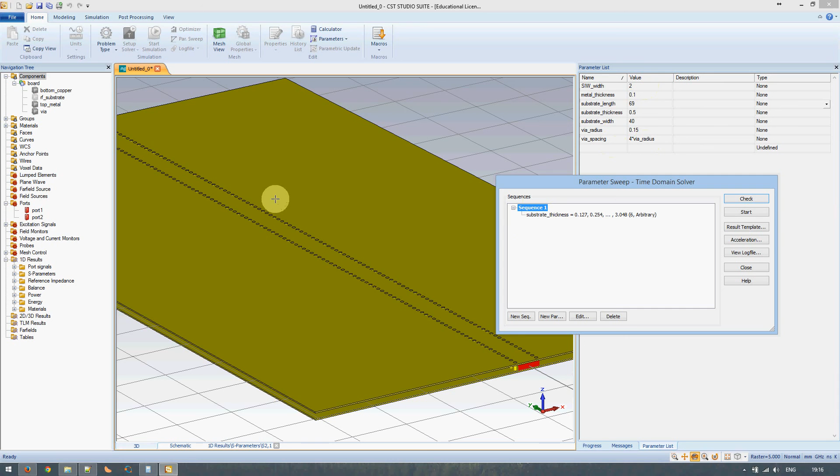Okay, so if I click the check button, yes, delete the results, then it will run through this sequence and show me what it looks like. This is the narrowest one, a bit thicker, a bit thicker, and a bit thicker. So this is just a sanity check so that you can make sure visually that your model works. Because sometimes you'll find that the mathematical expressions you've used to generate the structure don't always hold true for any arbitrary combination of parameters. So checking through this in the beginning is a good idea to make sure you have meaningful results at the end.

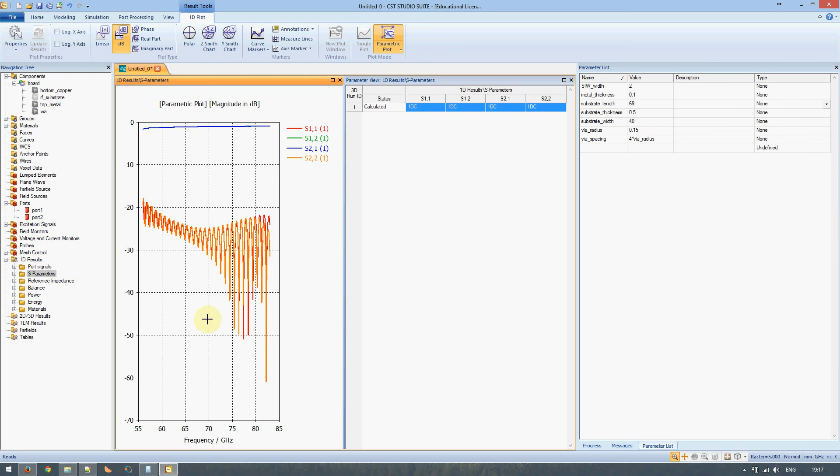Obviously, if you click start there, then your parametric sweep will start. You will be able to examine the results. Now, what I do suggest, close this, is that your S parameters will look like this. You'll have a list of them here, and they will all be plotted together. Particularly when your numbers become large, it can be difficult to work with. Now, here in the post-processing tab, you have the option to export your S parameters as Touchstone files, but instead of doing that manually, set up a template-based processing and have it done automatically.

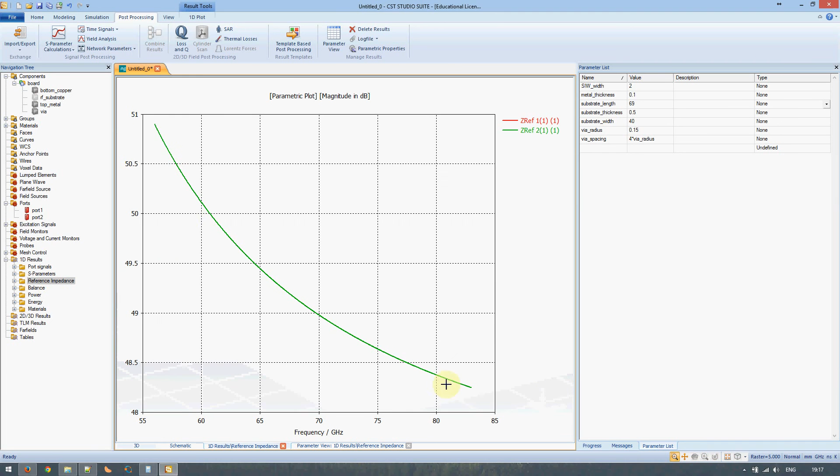So here, template group will be S parameters, Touchstone export. Number of samples, 101 is usually enough. You can have it as finely accurate as you want. Reference impedance 50 ohms. Remember that the waveguide impedance will not necessarily be 50 ohms. The one that's used here, I suppose it's close enough to 50 ohms. But because this isn't a line impedance, the 50 ohm doesn't really apply as such. In this case, it just coincidentally happened to be close to 50 ohms. Okay, so now that will export a Touchstone every time we run the simulation.

And so what will happen there is bring up an Explorer. Oh yes, of course. First of all, what I'll need to do is save this project. Should have done this right in the beginning. I'll just save it on my desktop and call it test1.cst. That's a bit of a silly name. SIW Duroid 6002 56 gigahertz. Let's give it a descriptive name so that you know what is going on. Save. Saving model. Okay, let me run the simulation again. And if I bring up Windows Explorer, desktop, there's my CST file, and you'll notice that it's created a folder with the same name.

In this folder there'll be Result, and in Result, once it's finished, these are the formats that CST saves its own data in. The results will be saved, a new folder will be here called Touchstone, and once it's finished, it shouldn't take too long, inside of that will be all the Touchstone files, numbered from 1 to however many runs you do, and in each case with the same name will be a text file with the parameters that we used in each of the runs.

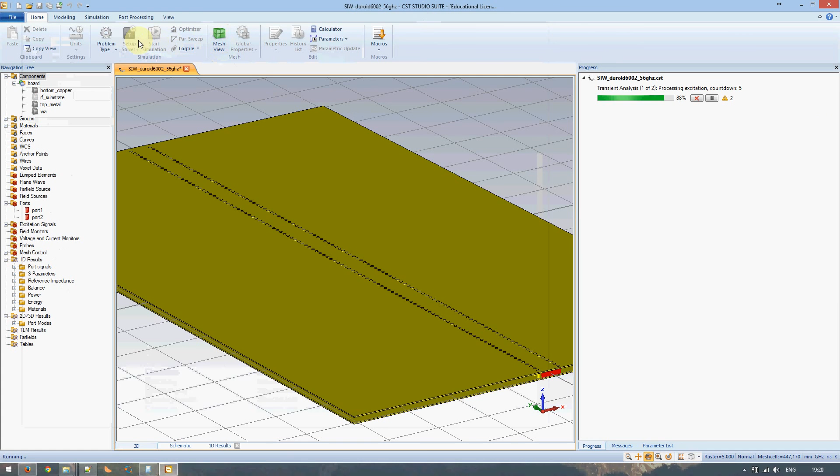This is just helpful in identifying, when you have looked at your Touchstone files and you've decided which one you like the best, you can go and look at the equivalently named text file and find out what the dimensions were. And then what I usually do is just go back to CST, apply those parameters again, and run the simulation again, but with higher accuracy. So say instead of 35, with a 40 dB accuracy maybe, or perhaps more mesh cells, just to make sure that the result is as accurate as possible before sending it in for manufacturing.

I think I have covered everything that I wanted to cover. That is the general idea, and you get a basic idea of the workflow in CST, of how to build a model, of how to simulate it, and how to interpret and understand the results that you get.

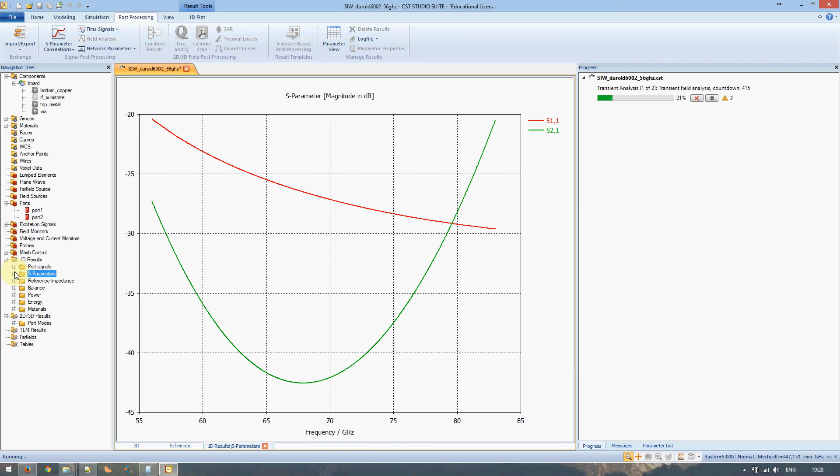Incidentally, if you look at the S parameters while the thing is still working, you'll see that it generates some results, but they're not terribly meaningful because the port signals aren't finished yet. You see, for example, that the input signal is finished, the red one, but it hasn't finished analyzing the output yet. So it's best to put that away and not look at it until the end. Just want to wait until this finishes, so I can show you the Touchstone file.

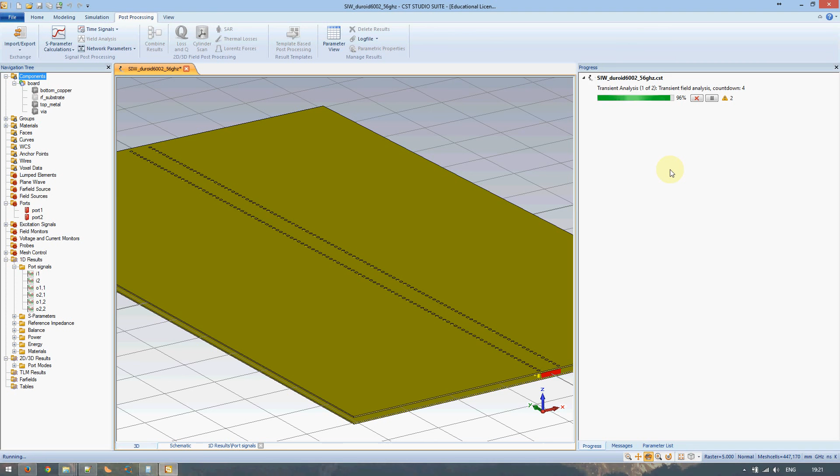What's taking so long this time? Right, I think that's what I've got to do.

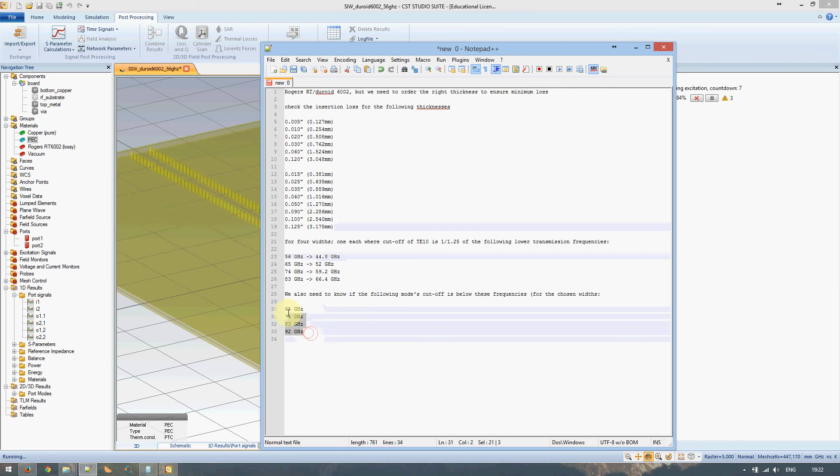Okay, so in order to answer this question, if you wanted to change the material, that's easy enough. You just simply add a new material and then drag and drop over to whatever it is that you want to change the material of, if you wanted to investigate a different substrate, for example. The thicknesses, the parametric sweep I've covered, port modes I've covered, higher mode cutoffs I've covered as well. Yes. Okay, nearly done.

Okay, you will need to play around with CST to find some settings. With every model, it's different. I've mostly worked with SIW at lower frequencies myself. 56 gigahertz is a little bit high for me, but quickly enough you'll find some settings which are comfortable for you. For example, at 56 gigahertz, a 40 millimeter or 70 millimeter long board is far too long, and no real system will end up being that long. So it's probably a bit overkill. I just wanted to demonstrate, just for demonstration purposes.

So if you work with a smaller board, say 10 millimeters long, then your simulation time may go down. Also, it's not necessary to have all of this open space on the side of your SIW. Make it a little bit smaller, and that will obviously reduce the computational load on the computer and make your simulations go a little bit faster. Naturally, don't cut too many corners, because you want your simulation to be valid, a reflection of what your physical product will do, what its responses will be.

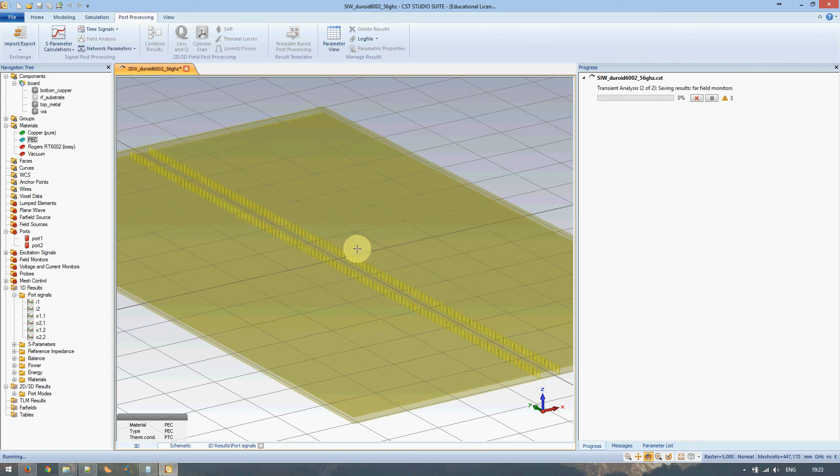Of course, there are many CST features which I haven't discussed in this video, but CST has very good documentation, among the best that I've ever seen of any software.

Okay, so here, Result, Touchstone files. The TXT shows what parameter was there. It only shows substrate thickness 0.5 because that's the one that was varied. If you vary more than one parameter, which you can do, obviously the amount of simulation that needs to be done then increases exponentially with every parameter that you vary. In any case, the Touchstone file looks like this.

You can visualize it with MATLAB or any other numerical package that you like. AWR is an example. It also in the comments gives you a little bit of information about what's going on here. The units are in gigahertz. You are viewing S parameters in a polar format, and your reference impedance was 50 ohms.

So this first number is S11, S21, S12, and S22. Now this number is linear, so it'll be varying between 0 and 1. It is not in dBs. If you wanted to get dBs, you need to take 20 log of this number. This number is in degrees. Again, this number is linear, and this one in degrees. So it's magnitude, phase, etc.